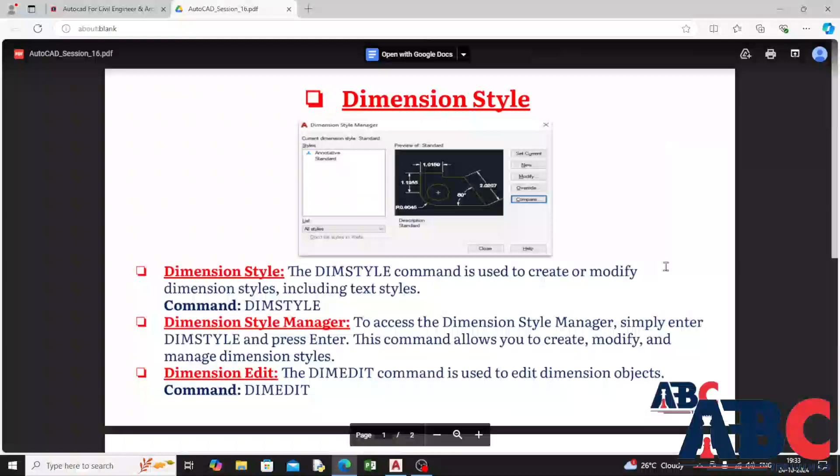This is my drawing, suppose one circle, then I am going to annotation. You can click on this arrow or you can type dim style. I will click on that arrow, and I will modify the previous.

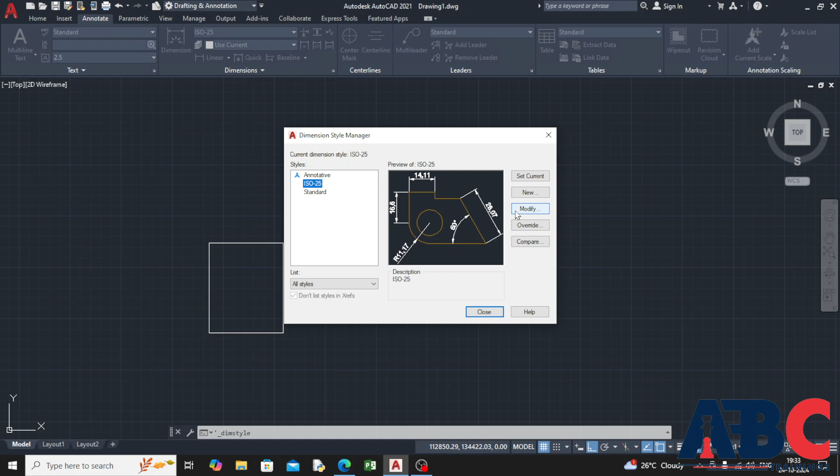In this you can modify the line, symbol, arrow, text, fit, primary unit, alternative unit, and tolerance. The first is dimension line, that is color, line type, line weight. You can change as per your requirement.

Then the baseline spacing, I will show you what is the baseline spacing. The spacing between the starting of the dimension line to your drawing.

This is a little bit trial and error method. You can use your own settings and it will be available to see how it looks.

You can see in this screen, the black screen showing you the dimensions. The baseline spacing, then you can extend beyond the dimension line, then how much you want to extend the dimension line, then offset from origin. You can see the offset. You will increase the baseline.

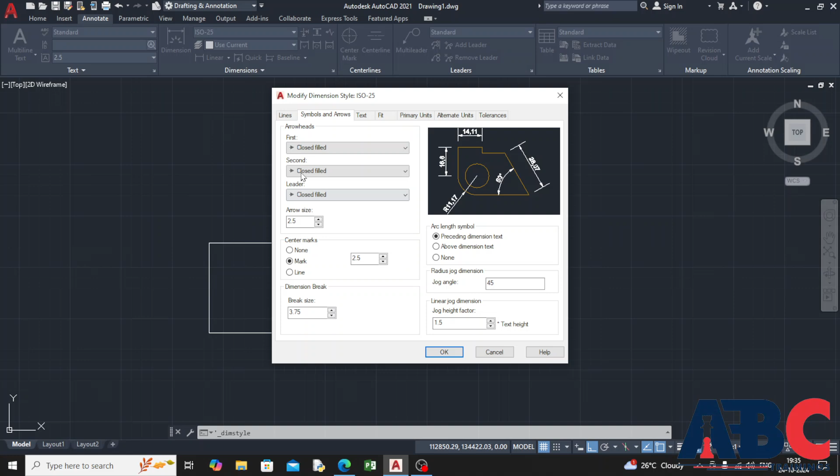Now it is perfect. Then next is symbol and arrow. You can change the arrow style: closed, dot, architectural, oblique, open. Then that terminal, user arrow, all are available here. Then second is similar, whatever you want.

Then leader, which type of leader you want: open, box, datum, triangle, integral, or none. From this you can add anything.

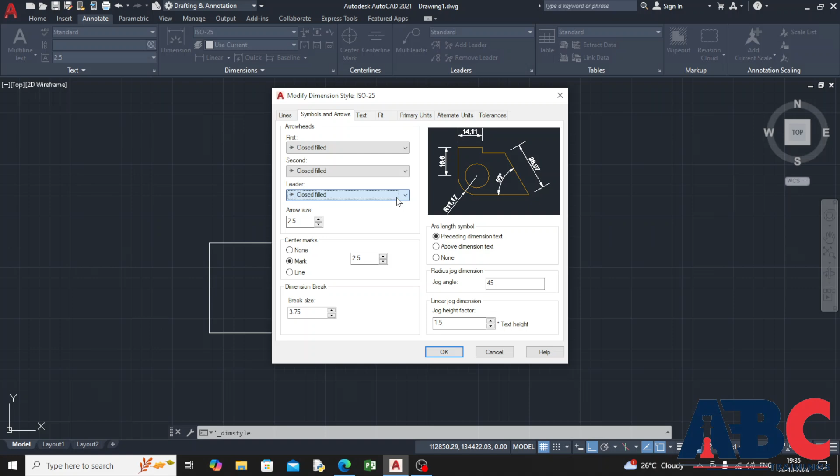Then you can add the arrow size also, that is, see the dimension lines show you how the arrow will look in your diagram.

Then the center mark, at which dimensions it will be none, mark, or line. Then dimension break you can use here, you can increase it.

Then arc length symbol, then jog angle is 45. Then next is text, how you want to add text: standard, annotative.

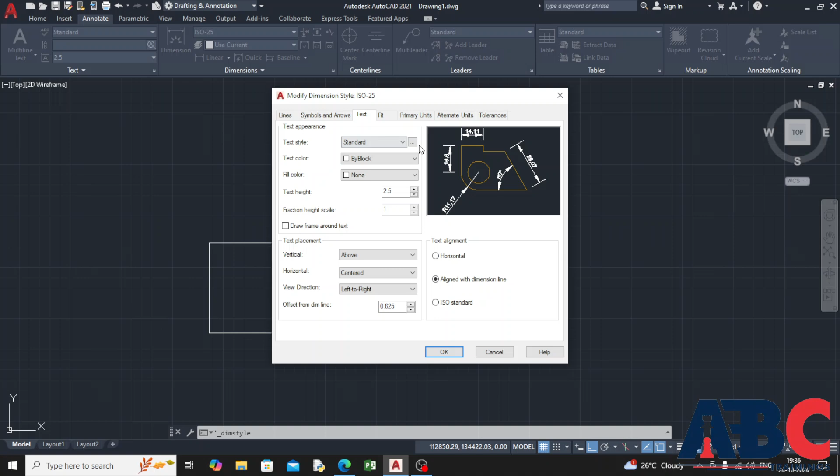Then block color, fill color, this text height, you can increase or decrease the height of text. Then draw frame around text, you can make a box around your text. Then alignment of your text: horizontal, align with dimension, ISO standard.

Then center, extension line. See, it changes in this window. I'll make it at center. Now the direction: right to left, left to right.

Then offset, what much amount offset you want, you can give the offset.

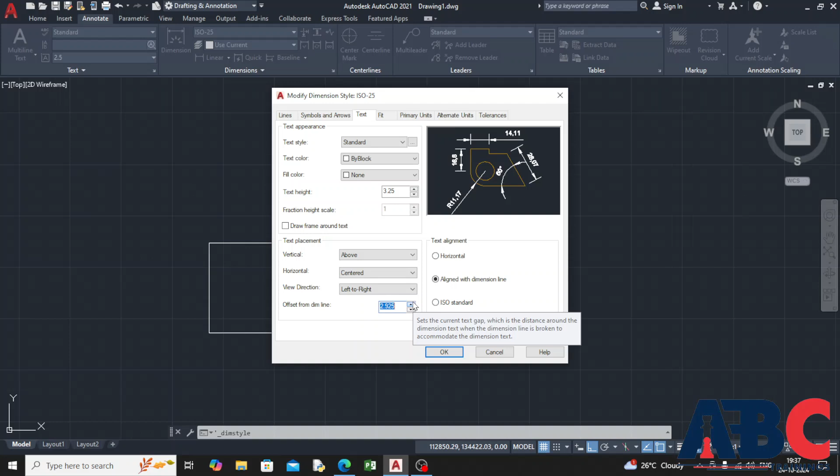Then fit, arrow, text. The fit options are available in ISO dimension style. Then primary units, you can give the units: scientific, decimal, engineering, architectural, fractional, windows desktop, scientific, decimal.

Then desktop, then decimal separator, that is period, comma, or space, it is also available, the period. Then round off at what much amount you want to round off, prefix suffix you want to add.

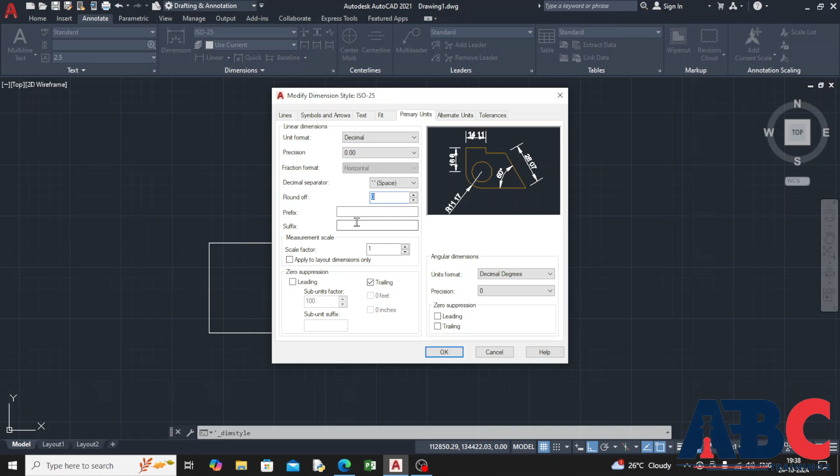Then you can add alternative units, display alternative units. You can click on it and it will show you alternative units.

And tolerance, that is what much amount you want the tolerance: symmetrical, deviation, limits, basic, and none.

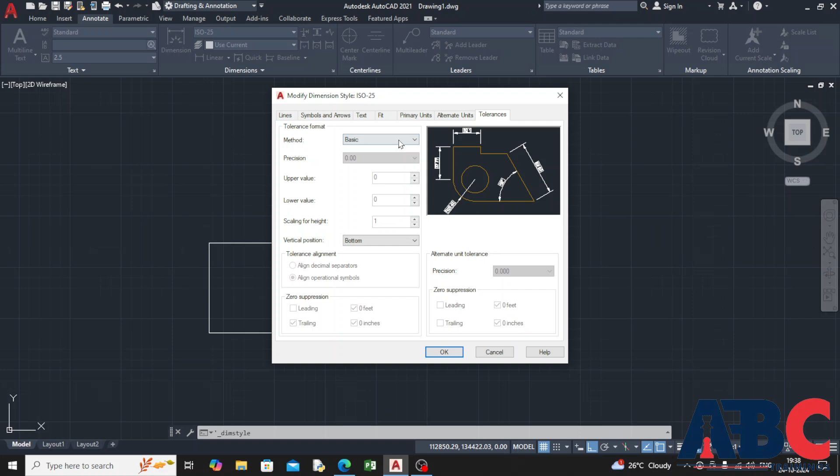This is the dimension style tool. Then after all the setting, you just don't forget to set current, then only it will be applied to your drawing.

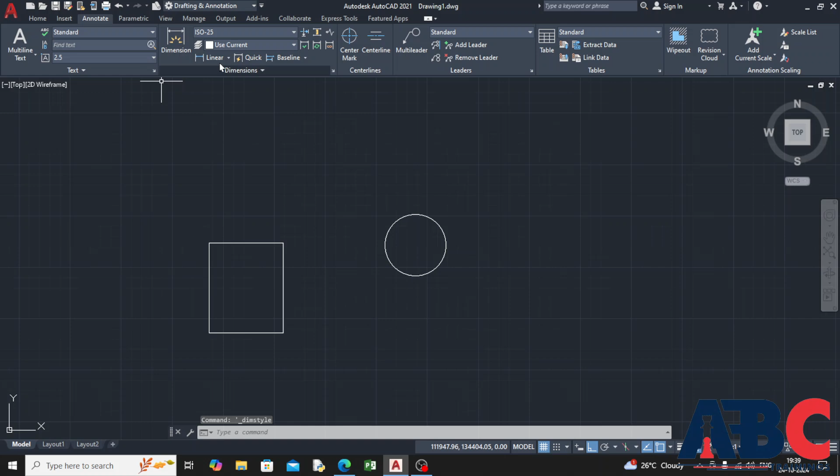And close, okay, linear, I will show you. This is the dimension. We have removed the point, that's why it will not show you the point.

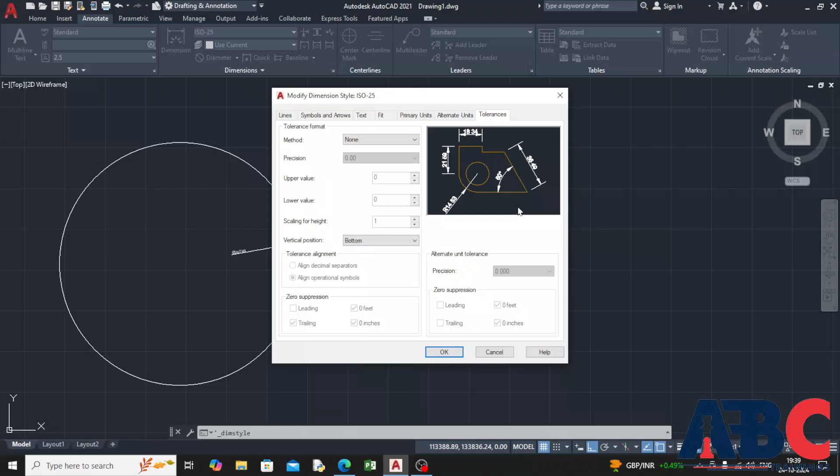I'm going to give the point, then modify. Period, okay, set current, close. See, the point will get added using this option.

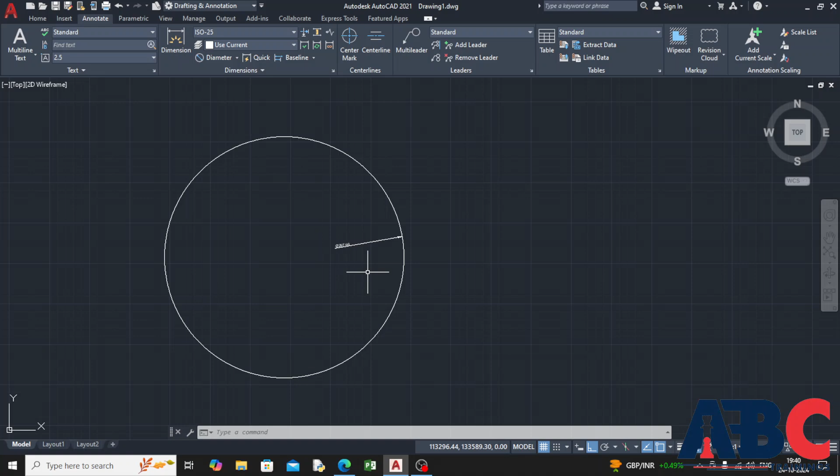Okay, hope you understand how to use this tool.